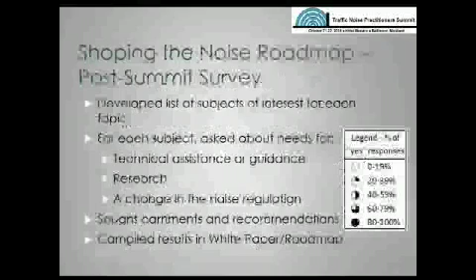So as a follow-up to the summit, we did a survey. We had a list of topics of interest, subjects of interest that came out of the summit, and we asked about needs for either additional technical assistance or guidance, or research, or perhaps a change in the noise regulation. We put those results together in a white paper and roadmap that is available on the AASHTO Center for Environmental Excellence website, and I'll show you that reference at the end of the presentation.

And so you can see we used the little scoring box on the right. The more filled in the circle was, the higher that need was in terms of positive responses from the participants.

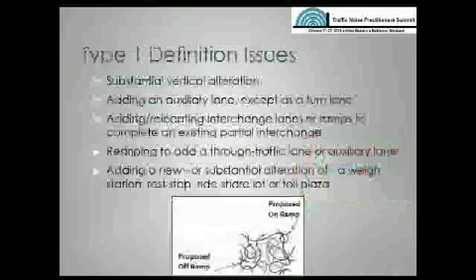So with regards to the Type 1 definitions, Type 1 projects obviously consist of a number of other projects beyond the standard construction on new alignment or widening that adds a through travel lane. And some of these other types of projects have created issues for some of the states, either in their definitions or in the amount of needed analysis or how to do that analysis.

In particular, 3 of the areas identified were: what exactly is substantial vertical alteration that would cause a project to be Type 1, a lot of questions related to auxiliary lanes, and in terms of the last item, why things like ride share or park and ride lots need to be included when they would seem to be a very small component of the overall noise environment.

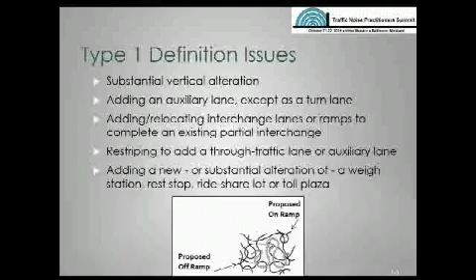And so through the presentations, we got glimpses of a number of issues and approaches that states were using. For example, North Carolina DOT provided 2 examples of projects with issues on auxiliary lanes that were being added as part of safety improvement projects, where the argument could be made that the projects were not Type 1 because they ended in turn lanes, which is one of the exceptions in the regulation. This first project was a safety improvement project that ended up being abandoned because it was judged to be Type 1, and there would have been a need for 6 feasible and reasonable noise barriers.

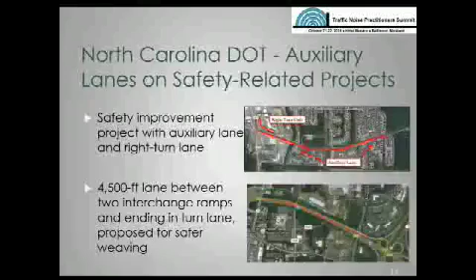It would have been a very high percentage of the overall project cost. The second example involved a 4,500-foot auxiliary lane between two interchange ramps, and while it exceeded the 2,500-foot length criterion in the FHWA noise policy FAQs for type 1, its status was unclear based on the language in the regulation, the analysis and abatement guidance document, and the FAQ. So just a couple examples of problems that caused some issues.

The Michigan DOT provided another example. This is a 15-mile long project involving capital preventive maintenance for the full corridor, shown in yellow, and a number of miles shown in purple of managed use lanes where they're using the shoulders during peak hours. The managed use lanes were type 1, but as we know in 772, the entire corridor had to be called type 1 because part of it was type 1.

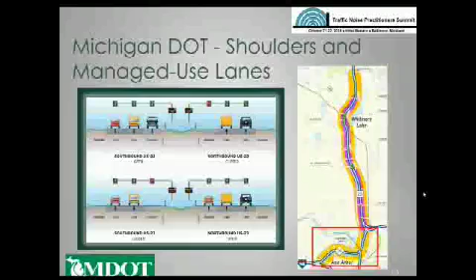As a result, barriers were going to be needed on that section shown at the bottom in yellow, where only preventive maintenance was going to be performed. MDOT's solution here was to break the project into two separate projects, so they really only had to do the noise analysis on the part with the managed lanes and a little bit of the preventive maintenance up on the top.

Coming out of this, in terms of the roadmap items, we see there were five items shown here that were of high interest in the discussions in the session, and all of them had a fairly high level of interest for more technical assistance and guidance, with auxiliary lanes leading the way, despite the FAQ on that subject.

There was some need for research shown in the center column, again on substantial vertical alteration - how much vertical alteration is substantial enough to cause a change in sound levels - and some interest in shoulder use and auxiliary lanes. In terms of regulation change, the only items that showed some interest were further clarification on auxiliary lanes, and then perhaps taking out park and ride lots as a type 1 project.

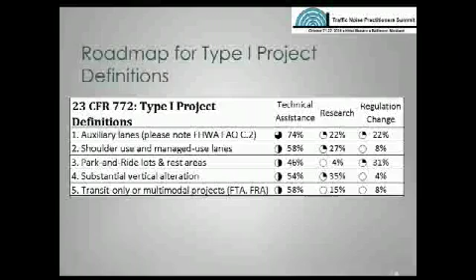Now, out of this session, there are two items that emerged that really apply to a number of the other topics as well. The first of these was that the guidance is currently spread over several resources. It's in the regulation itself, it's in the analysis and abatement guidance document, and it's in the FAQs on the Federal Highway website.

The states were calling for a consolidation, either into a single document or going through these different resources and making the guidance consistent between them. The second takeaway was that there was need for a better mechanism for the SHAs to learn about new policy interpretations, guidance, and FAQs. It seemed that a fair number weren't aware of some of these items. We'll talk about that a little bit at the end on tech transfer.

The second topic dealt with the activity categories in the regulation and the evaluation methodologies for non-residential land uses. There was a lot of discussion in this session, probably more issues and questions raised.

Some of the items of interest dealt with Category A land uses. There is an updated FAQ on that. We had an example from Wisconsin DOT where a national cemetery was determined not to be Category A because there was no case established for extraordinary serenity, with an existing road already passing through it. Cemeteries were a hot topic of discussion, I guess you'd say.

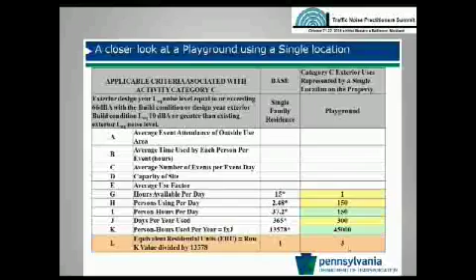Montana DOT has taken that a little bit further, having seasonal adjustments for use of the facility based on the average number of hours of sunlight in different months of the year, then looking at seasonal usage of the property and developing an adjustment factor to reduce the equivalent receptors calculated in a separate manner. So those were just a couple examples of some of the evaluation methodologies.

There's a fair amount of interest in some of these different subjects in terms of additional technical assistance and guidance. Prime among these was dealing with the definition of what is active versus passive land use, what is frequent human use, what are frequent human use areas with things like trails and cemeteries, shown as item 3.

Also, some interest in reclassifying or reconsidering some of the current land uses, identifying and classifying some of the newer land uses that aren't in Table 1 of the regulation, and again, looking at the equivalent receptors for non-residential land use. Research needs: dealing with active and passive land uses, reclassifying or reconsidering the land uses in the reg, and equivalent receptors.

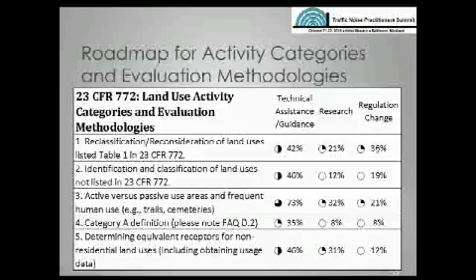Third session focused in on noise screening procedures, and there was a lot of interest in this session. This is both screening in terms of impact assessment and then screening as a way of minimizing or avoiding having to do a detailed noise abatement analysis.

Montana DOT made a good case for why a screening procedure would be a very useful thing to have, talking about the long distances to travel from headquarters to far corners of the state, the high costs associated with that travel, and the fact that they have limited central office personnel to do all this work. It raised the question of what value is added by having to go do measurements and model validation, when in a lot of cases the conclusions might be foregone as to what the answers are going to be.

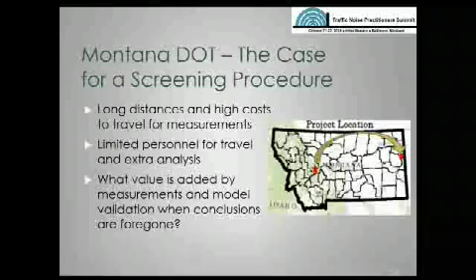I think that sentiment was echoed by a number of the delegates from other states. I think it's fair to say that Federal Highway acknowledges the desire for and usefulness of screening.

At the summit, Mark spoke of a 2-lane low-volume screening tool being developed by the Volpe Center as a replacement for the old TNM Lookup program. You'd enter in the volumes by vehicle type and have pull-down menus for speed and distance. Right now there's some work going on to define what a low-volume road really is in terms of the sound levels produced.

We know that Kansas DOT uses about 1,200 vehicles per day in its noise policy, whereas in contrast the Manual on Uniform Traffic Control Devices defines low volume as 400 or fewer vehicles per day. And AASHTO uses 400 vehicles per day in its definition of very low volume roads.

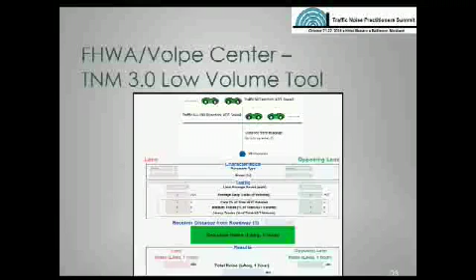Regardless of the threshold, it's still important to note that if any screening tool does identify impacts, 772 still obviously requires the abatement feasibility and reasonableness analysis.

Kentucky Transportation Cabinet has recently revised its policy to look at some of these issues, using a tool you may not all be aware of called NAFRAT from Federal Highway, which allows you to assess different policy changes in a spreadsheet format. That's available on the FHWA website. Kentucky is one of the first we know of who exercised that to try to look at some of these things.

One of the changes they made based on the analysis was to focus in just on the front row benefited receptors when they do their noise reduction design goal testing. But in terms of a way of doing screening, they had an interesting twist in the feasibility criterion: it was set at 5 dB at a minimum of 3 impacted receptors for a barrier to be feasible. So if you had an isolated single or pair of receptors, it would fail on feasibility, and you wouldn't carry forward into the reasonableness analysis.

And what was the name of that tool again? Oh, my screen graphic, there it is. We weren't able to get permission to use that white duck that sells insurance, so we have our own Federal Highway duck to tell us that the name of that tool is NAFRAT. And I'm only able to make fun of that because I came up with that silly acronym myself.

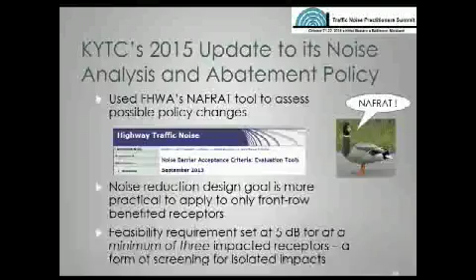So there are some opportunities to introduce noise in a proactive manner without having to do formal modeling or assessment, to help understand noise as a potential impact within the whole transportation program.

Along that line, New Hampshire is in the process of modifying its policy to move from a cost-based criteria to an area-based criteria. They're also blending in some additional optional factors, moving from a base of 1,500 square feet for benefited receptor. They plan on decreasing that base based on the percentage of benefited receptors that were permitted for development within a year after the policy implementation.

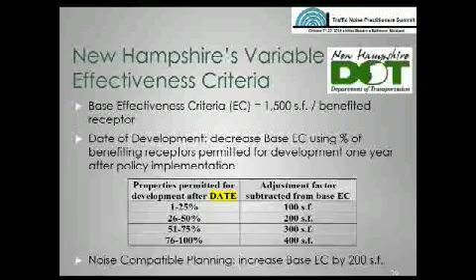But if the locality has implemented noise-compatible planning, they'd increase that base allowance of square footage as they determine reasonableness. So as I understand it, that policy is not quite finalized yet, going through some internal review.

Tennessee DOT has used a number of allowances for a number of years in its policy, prior to the 2011 change when they moved over to an area-based criterion. They have a base allowance, and that base allowance actually depends on whether or not the community pre-dated or post-dated the highway.

And then additional square footage allowances if it was a previously studied Type 1 project, based on the future noise level, based on the increase in level, and whether or not noise-compatible planning was in place at the local level.

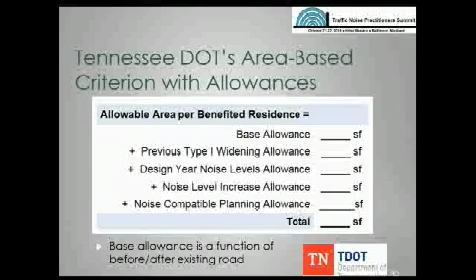One of the tools that we found interesting was a WFR, Warranted, Feasible, and Reasonable worksheet that Virginia DOT has developed. They use that to document the decision-making process and it becomes part of the project file as a barrier analysis is completed. It's done for each impacted area that warrants consideration of abatement, and finalized before they go into their final noise abatement design report.

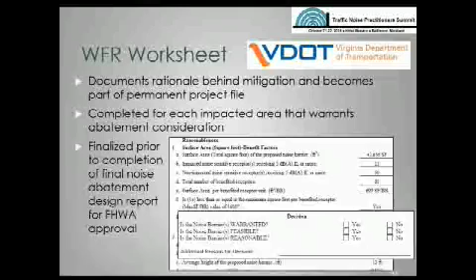So this type of documentation is just an example of something that is a good way of having good documentation of the decisions made on a project.

Georgia DOT has also gone through some policy revisions that I believe were just approved last month. They tried to provide clearer guidance on feasibility and reasonableness. The concern here was that they were getting differing interpretations because of the wording in the policy, in terms of their overall goal, which was really reducing impacts, not simply meeting the noise reduction design goal. And they were trying to reduce the amount of modeling differences they were getting from different consultants.

They updated their cost estimates and their unit cost based on their last 5 years' actual costs. They didn't change their unit cost or reasonableness cost criterion, which was $55,000 per benefited residence.

One interesting feature here is that building permits are not considered valid or current if they've been in existence for more than 3 years and the property still has not been developed.

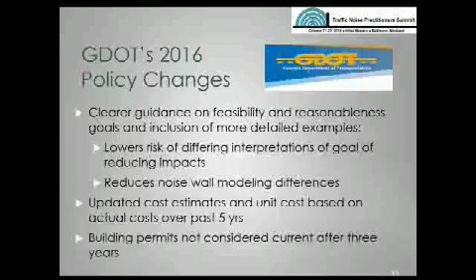Although no real need for any regulatory change was identified in this session.

The other reasonableness criterion that was examined, and again a lot of interest in this, was the consideration of the viewpoints of the owners and residents living near the project.

As with the previous session, I kicked this off with a follow-up to that same research project that RSG, ourselves, and EA had done, looking specifically at this criterion, just to set the stage. The takeaway is that there's a lot of different bases that the SHAs are using in the decision-making process. Some are going in terms of a vote in favor of the project, while others are requiring a vote opposed to the project. Some are going based on just the percentage of votes received, while others have been using a percentage of all the possible votes, whether or not they were actually submitted or returned.

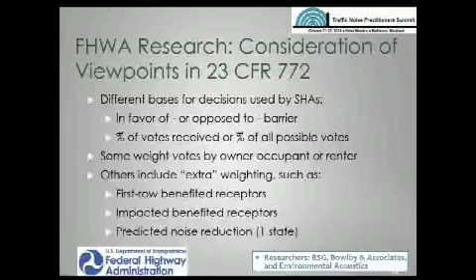So we had some examples from some of the participants. Wisconsin's process involves 1 vote each for owner-occupants, renters and off-site owners, so rental properties actually get 2 votes to 1 vote for an owner-occupied property. They just require a simple majority of the returned ballots. If they don't get at least a 50% response rate, they'll go out for a second solicitation, but if that still comes in under 50%, they'll go ahead with the project.

One thing of interest, they try as much as possible to hold a public involvement meeting and do the actual voting no more than 2 years before the actual project letting. The hope being that those who voted will still be in the properties being affected when it comes around to project development time.

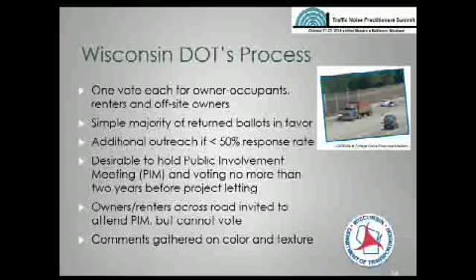They also invite the owners and renters across the road, but they're obviously not allowed to vote. They do gather comments at the information meeting on color and texture, trying to give preference to the residents on the residential side and to local government on the highway side.

Oregon DOT is similar in the first couple aspects of this. If they don't get a 50% response rate, they'll go back and poll a second time, and even if they still end up under 50%, they'll go ahead with the project, with the majority of the return votes or voting points determining the outcome.

They give the owner and renter, as Wisconsin did, each 1 vote on single-family properties, but they have a somewhat unique way of looking at multi-unit properties. For apartment complexes, the property owner gets 1 vote, and then based on the returned ballots of all the renters, there's one collective yes or no vote for the renters.

Condominiums: the owner occupants of each unit and the offsite owners each get a vote, and the renters for the rental units get one collective vote, just like apartments. In contrast, with mobile home parks and trailer parks, the property owner gets one vote and each resident gets one vote, not a collective vote. So just some interesting twists on the voting process there.

Minnesota DOT was a very interesting case. They had a noise barrier audit called for by their state legislature, and a noise policy review process was developed. The goal here was to increase transparency in barrier policy decision making. They put together a policy advisory committee of 3 state representatives, 3 state senators, and 2 citizens who voted on the draft policy revisions for 2015. The policy then went out for public comment before going to FHWA for approval.

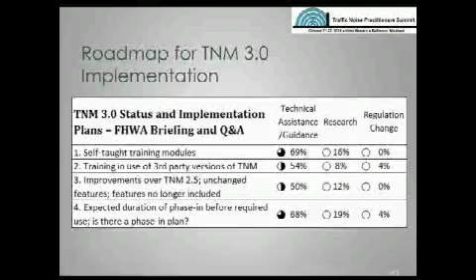Takeaways in the roadmap: not much need was seen for regulatory change or research, but there was interest in self-taught training modules. The fourth item was learning more about the phase-in process before use of the program is required, and then just more interest in training and some of the changes in the features.

That wrapped up the first day. It was a real productive and busy day.

He was relating some of the updated FAQs on the website for transit-only projects, where if FTA has the lead and no federal aid highway funds, you need to use the FTA noise and vibration guidance document.

I mentioned earlier about the auxiliary lanes for Type 1 projects, so the 2,500 foot length requirement. The soliciting of views, and this comes out of some of the work with Minnesota and North Carolina, where non-votes are not to be counted as either a yes or a no. And so this may require some SHAs to have policy changes.

He talked about environmental justice and Title VI, the Civil Rights Act issues, and some recent HUD challenges on impacts on HUD-related properties by a couple DOT projects, where HUD was pushing for application of its 65 dB day-night level criterion. This is a subject of a lot of interest to a lot of us in the states and elsewhere, and so a lot of interest in keeping up to date and in tune as to how that's going to evolve. Mark spoke of the noise barrier inventory required by 772, hoping to have that out this spring.

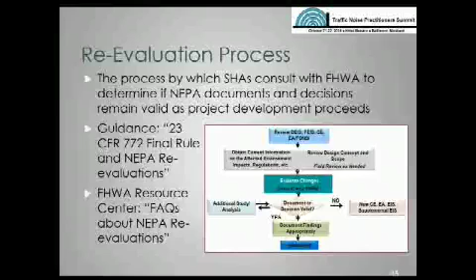Mary Ann talked a bit about the reevaluation process, which is defined as the process by which the states consult with FHWA to determine if the NEPA documents and the decisions remain valid after some time has passed and as project development proceeds. She pointed out some guidance available on NEPA reevaluations and 772, on the Federal Highway website and on the noise page and elsewhere from the Federal Highway Resource Center. A very good pair of articles on some FAQs on NEPA reevaluations, and the web links for both of these are given in the white paper.

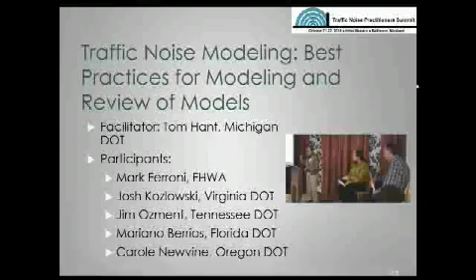Federal Highway has already been aware of this desire by states regarding TNM modeling, and they actually have a research effort underway on best practices for TNM modeling. That research is being conducted by HMMH. The project has three primary components or research areas, including TNM object input, noise barrier design optimization, and TNM quality assurance.

The TNM object input is going to focus on three items. Those include best sources of topographic and geospatial data. I know our sources have gotten much better over the years, and they are continuing to improve. Also, they're looking at guidance for development of traffic data and recommendations for any additional TNM output tables that we might like to have available to us when we do our TNM modeling.

That research is essentially complete. Federal Highway expects to have that report posted on their website sometime in March.

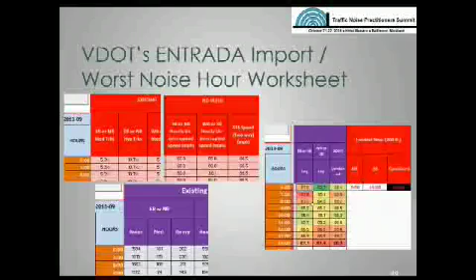An example of a tool that has been developed and is being used to improve their TNM modeling is Virginia DOT's Entrada traffic worksheet and associated worst noise hour worksheet. We've got some screenshots shown in the slide here. The Entrada portion of their tool provides detailed hourly traffic, includes vehicle classifications. It calculates operational speeds and levels of service. And then the worst noise hour sheet uses that traffic data from Entrada to calculate those hourly sound levels and identify the worst noise hour, as shown on the screenshot on the right of your slide.

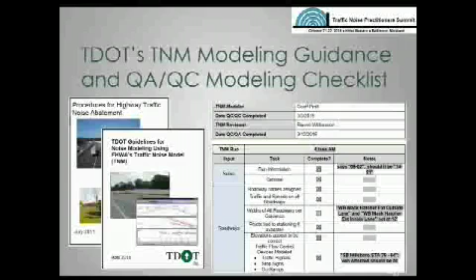This checklist covers all of the input of TNM objects. As you can see, you've got your input object and then a task and a completed and notes. This checklist needs to be completed for all TNM runs that are done on TDOT projects, and then those are submitted when the TNM runs for the project are submitted.

Florida DOT has a separate traffic noise modeling practitioner's handbook. It includes guidance on developing traffic data, TNM inputs, including how to conduct noise barrier optimization and development of recommendations. Their handbook also covers the public involvement process as well as noise study documentation.

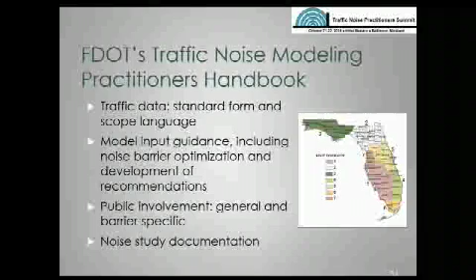Oregon DOT has a noise study QC and report review checklist that they use, and it can be used by either the analyst or the reviewer or both. In addition to some of those more basic items that we generally check for in reviews, Oregon reviews the existing noise environment, including all the measurements and all the TNM model validation runs, the analysis results, including predicted sound levels, the analysis summary and contours for undeveloped lands. Oregon also has a noise evaluation and recommendation form that needs to be completed for every noise barrier that they evaluate, so they do a QC/QA on that as well.

In terms of the roadmap for traffic noise modeling, there was a desire for technical assistance and possibly some guidance on best practices for TNM modeling and/or the review of TNM models, model validation, noise study process for local programs projects, which can sometimes pose an interesting issue in that the consultant or the locals doing that project may not have adequate knowledge or experience to conduct those noise studies. Also some assistance or guidance perhaps on determination of the worst noise hour traffic volume in addressing planned future projects within the limits of the project you're currently evaluating.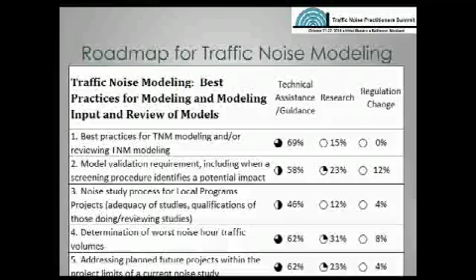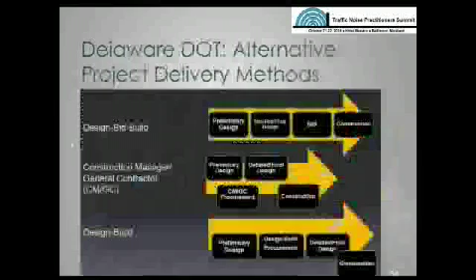The next topic, also of a lot of interest, is design build projects as states are moving forward. This is becoming a more common delivery method for projects, and it poses some interesting challenges when noise barriers are included in those projects.

We kicked off with Delaware DOT, which provided an overview of their experiences using three different alternative project delivery methods, including the more traditional design bid build process, the construction manager general contractor (CMGC) process, and the design build process. Delaware has not done a design build process, or really any project, that included noise barriers.

However, Georgia DOT has significant experience with design build projects and noise barriers. They call it striking a delicate balance when dealing with noise barriers on these types of projects, and they've had a lot of challenges. Some of the challenges they noted at the summit were differing interpretations of their noise policy, trying to fit these design build projects, which are very unique and dynamic, into the more traditional design bid build mode, and trying to figure out the best times for public outreach and coordination within that dynamic process.

Bill mentioned previously that Georgia updated their noise policy recently, and they included in that update some changes to close loopholes and eliminate conflicts in their process related to the changing noise barrier design process within design build projects. It's not noted here, but Georgia has also used the design build finance project delivery method, and I believe some of those projects have included noise barriers as well.

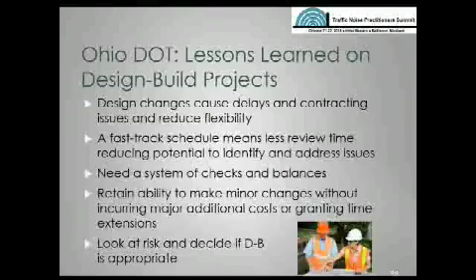ODOT believes that a better system of checks and balances would be beneficial, and that it would be in the DOT's best interest to negotiate to retain some ability to make minor changes without incurring major costs or requiring time extensions on the project. As a final note, ODOT considers all these factors when evaluating risk, to help determine if a design build delivery method is the most appropriate approach for any given project.

North Carolina DOT has also constructed a good amount of barriers on design-build projects. In fact, 80% of the noise walls that they are building have been on design-build projects. A few notes on North Carolina's experiences.

North Carolina solicits viewpoints before the RFP for the project is issued. The design-build contract itself contains minimal noise criteria. The contractor is actually required to use the barrier design that is provided by NCDOT, and any proposed changes must result in no net loss in noise reduction benefits for the project.

North Carolina also noted that their current 10-day review period for changes is too short. They're not able to effectively and efficiently evaluate the consequences of those changes in a short time. As another note, North Carolina began its first public-private partnership project last summer that included 21 noise barriers.

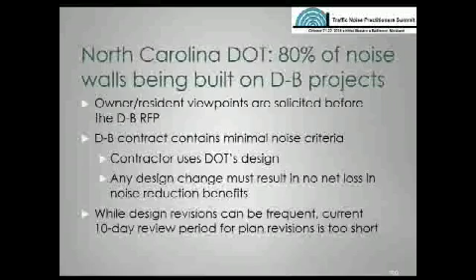Desire for technical assistance in dealing with that whole noise process during reevaluation. It really is this chicken and egg process, and some additional guidance on that would be helpful.

And finally, the cost-sharing mechanisms for noise barriers that are removed during the design process. There could be some disincentives for contractors to look to remove those barriers as they move through those types of design-build projects. There's really no need for research or regulation change in this area.

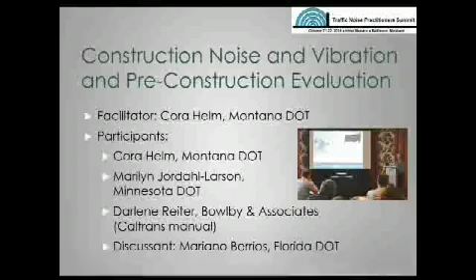Moving on to the next topic, this was the 10th session of the summit on construction noise and vibration and pre-construction evaluation. As Bill mentioned previously, there was a significant focus on effects on wildlife in this session.

Several states noted various issues with construction noise effects on wildlife. Montana uses a three-part approach in dealing with these potential wildlife effects. It includes avoidance, minimization, and mitigation, three terms we see often in NEPA.

But they've noted they have had a lot of challenges with doing the analysis and the assessment and monitoring and mitigation. And they really noted a lot of issues dealing with the U.S. Fish and Wildlife Service having requested inappropriate timing restrictions on projects and applying noise criteria from different environments and for different species than what they are evaluating in Montana.

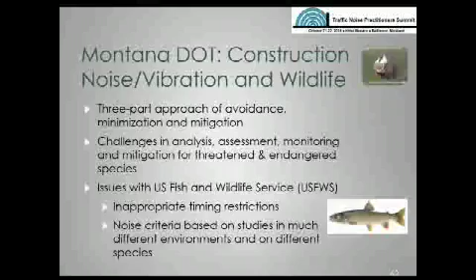Several other states noted issues similar to those in Montana, including similar issues with U.S. Fish and Wildlife, and those were Idaho, Utah, Alaska, and Florida. There was just generally an agreement and a call that there really is a desire for some better science on this topic to help address these issues that a lot of states are having.

Alaska noted that they have a lot of projects in marine environments, and they are currently conducting some of their own research to improve the science. They also noted that there may be some potential for a programmatic agreement regarding the sound and pile driving activities in those environments.

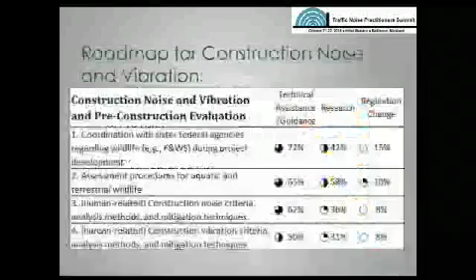In terms of the roadmap for construction noise and vibration, there's a clear desire for technical assistance or guidance, and possible research on coordination with sister agencies on wildlife effects, as well as assessment procedures for wildlife. On the human-related side, there's a desire for technical guidance or research on construction noise and vibration criteria, analysis methods, and mitigation techniques. There's an NCHRP research project underway currently to improve Federal Highway's roadway construction noise model, RCNM, which should help satisfy some of the human-related research needs expressed in our survey.

Finally, there was some desire or call for a potential regulation change to address wildlife effects. The current regulation we deal with is human-based, focused on frequent human use, so we don't address wildlife in our current noise studies.

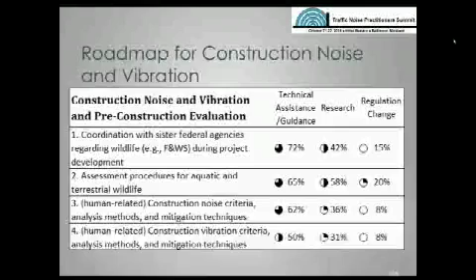I'm waiting to advance here. Apologize. Got a little lag here, I guess. I'm not really sure why this is taking a little bit longer. I appear to be stuck. Katie, this is Bill, do you want to take control or pass control over to me? We can try to advance it. Yeah, I was trying to advance it as well, and it's not advancing for me either. Maybe Darlene can do some hand puppets on the screen for everybody. I'm sure everyone would love that. Okay, try it now. Hey, got it. Excellent.

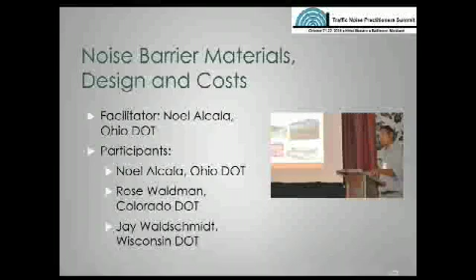The next session, the second to last of the summit, was on noise barrier materials, designs, and costs. Okay, I was able to advance. So Ohio DOT shared some of their experiences on this topic.

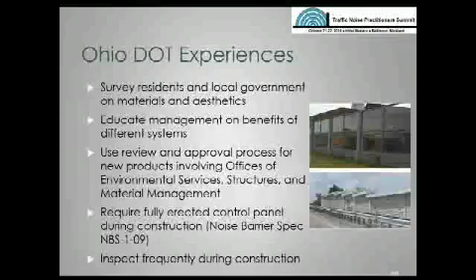They noted that they survey both residents and local governments on materials and aesthetics—not just the residents, but the local governments too, which varies from state to state, as does whether states even consider residents' viewpoints on aesthetics. ODOT has made efforts to educate their management on the benefits of these different systems. They have a review and approval process for new products involving several ODOT offices. They also require the contractor to construct a control panel for acceptance in accordance with their noise barrier specification, done for all projects involving noise barriers. Throughout construction, they inspect the barriers frequently to ensure any issues are addressed in a timely manner.

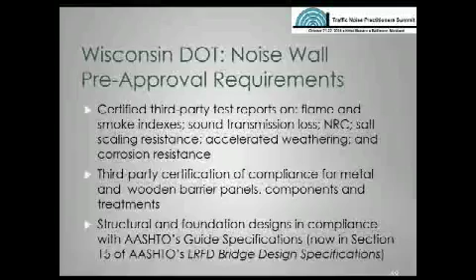Wisconsin's noise wall material approval process is similar to Ohio's. They require suppliers to provide independent test results for things such as flame and smoke indexes, sound transmission loss, salt scaling resistance, accelerated weathering, and corrosion resistance. They also require third-party certification of compliance for metal and wood barriers, their components and treatments. They noted that structural and foundation designs must comply with AASHTO specifications currently included in Section 15 of the LRFD design specification.

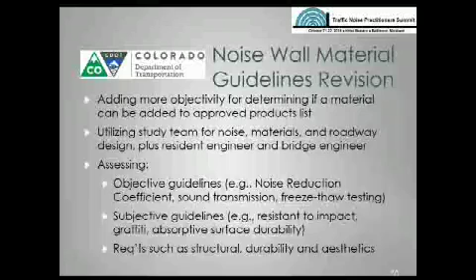Colorado DOT had a previous noise wall materials guidelines document and are currently modifying it. They've established a diverse study team with representatives from noise, materials and design, a resident engineer, and a bridge engineer. They're trying to add more objectivity to their process for determining if a new material should be added to their approved product list. The team is evaluating objective guidelines such as the noise reduction coefficient, subjective guidelines, and other factors such as structural durability and aesthetics.

So with that, I'll turn it back over to Bill to cover the final topic and roadmap and summarize. Thank you. Great, thank you, Darlene.

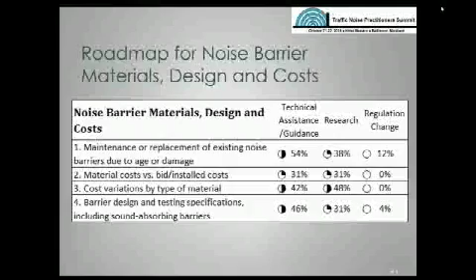Not sure if I have... don't have... there I do. Good. Now the last topic was something identified in the planning process as of interest. It really encompasses three things: tech transfer, training, and recruiting. And it turned out to be a big topic of interest at the summit.

One important resource available to the state programs is the Highway Traffic Noise Work Group within AASHTO. This is chaired by Danielle Schellenberger of PennDOT, and it's under the AASHTO SCOE, or Standing Committee on the Environment. As of the summit, it had 26 different member states. The purpose was to provide a forum for various noise issues to be addressed and for information exchange among member states. There's a lot of interest in recruiting more states into this work group and becoming more active in a number of ways.

I'll give a few ideas in a moment, but clearly the need for more tech transfer was identified. Some of us are getting older, so recruiting new people into the field is a concern and an issue, and there is some difficulty with it.

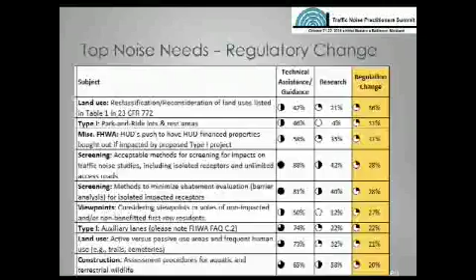So just to conclude the formal part of the presentation, the Summit was a success. Nearly 80% of those who responded found it extremely valuable, and I'd say most, if not all of the others, found it valuable in one regard or another.

This one comment really sums it up that we received back: there's really no substitution for face-to-face peer exchange. A big takeaway from the summit was that we had a real mix of some very experienced practitioners who've been doing this for a long time, and a lot who are relatively new to the game.

As a matter of fact, in the process of developing our invitation list, we identified at least a dozen people who weren't even on the TRB list of state highway noise representatives because of changes made over the years. And many who attended really hadn't had the opportunity to network with their peers through things like the TRB Noise Committee annual meeting and summer meeting, largely just because of travel funding limitations.

And so coming out of that, nearly 90% of survey respondents would like to see periodic summits, either every year or every 2 years. But the next point is that it's really contingent on outside travel funding—it's an absolute necessity. Even some of those who wanted to come were unable to, even with the outside funding being provided. I think going forward there'll be more emphasis on roundtable discussions, breakout sessions, and things like that.